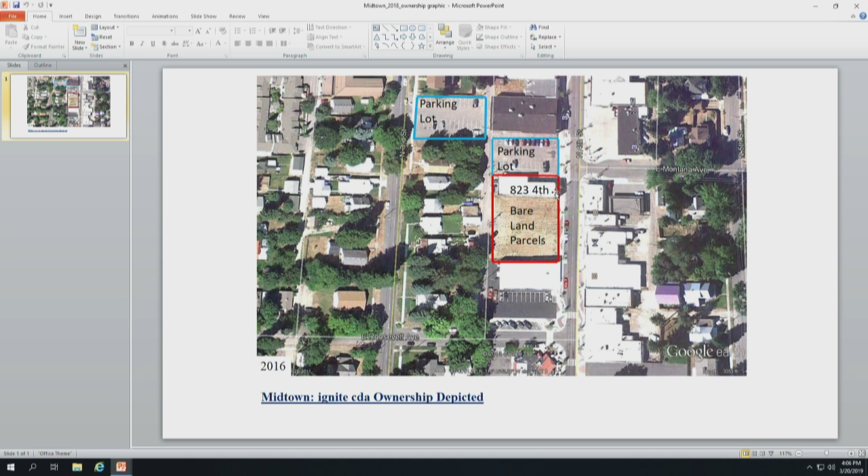She felt the board needs to choose one proposal and move forward. To that end, she suggested that within the next two weeks, by March 6th, interested Midtown stakeholders should provide specific written feedback to the board regarding the two proposals. The agency received feedback from 19 individuals, and that feedback was forwarded to the board for their review. So with that, I'll turn it over to Commissioner Garcia to lead the conversation regarding these proposals.

So, conversation is, I'd like to have a conversation about your comments, thoughts about the two proposals we received, both through the written proposal and the presentation, and just where you're coming from at this point.

Anybody? Comments? Questions? Jim's ready.

I think they were both very well done presentations, but one of them seemed to represent the green space a little further than the other. Also, the timeline for completion on one was far better than the other. I don't know if we want names right now, but there was one that, to me, exceeded the other. And I personally have made a decision.

Are we looking for a name? We're looking for your view, your opinion. Both were good, one was outstanding. I don't think it's out of line to know what you're talking about. Well, you need to know too. All right, again, I wasn't sure of the process. So, the John Butler, in my opinion, far exceeded the other one.

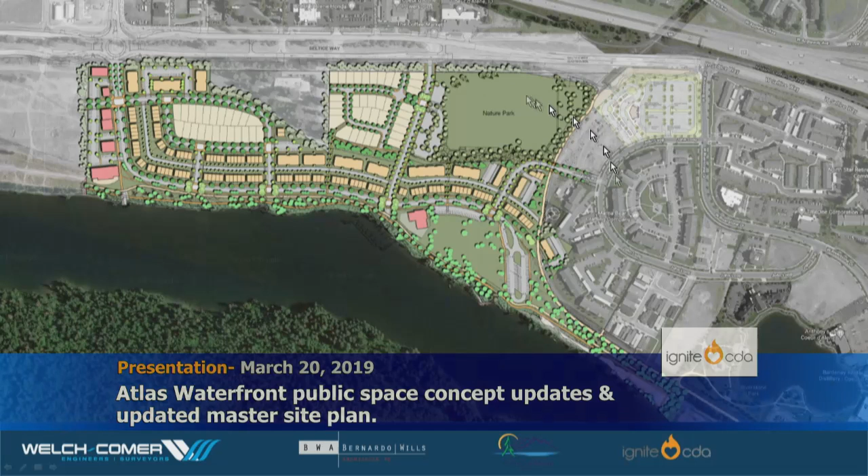Phil, will it still turn and come towards the river, or will it just be straight now? It'll still come down through the river, good question. It'll continue straight through like this, and then we'll still have this turn coming this direction.

This is a really great view, and we want to retain that as we can. It also sets up some nice parcel layout here, and I'll show you a slide of that in a second. One other thing I'll point out is this parking lot, we've still retained this.

Our hope is to make that go away. We're working on a total site parking count and analysis. That's one of the things we heard at our workshop last Friday with City Council and Parks and Rec. City Council is concerned about parking, the neighborhood parking, the Midtown situation, the Fort Grounds area, the things that happen with neighborhood parking when you have great public spaces like this. We're going to focus on trying to put the parking in this area and expand this parking lot and not have to do anything there. We may have on-street parking here, and we may end up with waterside on-street parking here. It's not our first choice, but we're trying to strike a balance between open space, great views, and functionality.

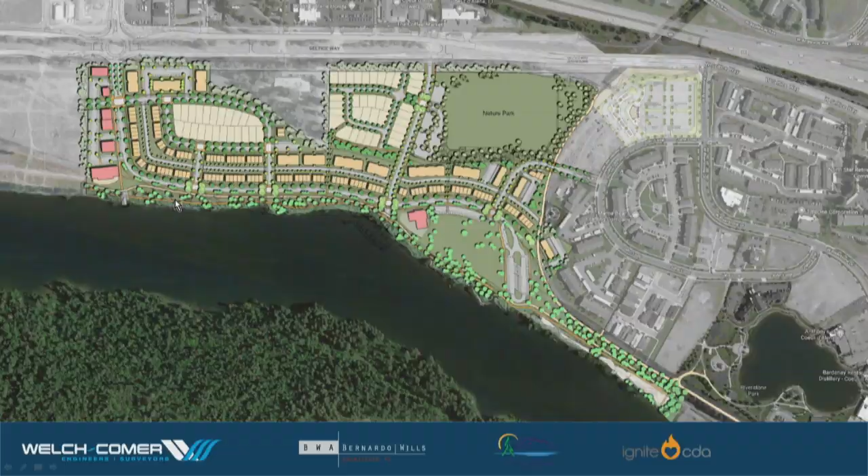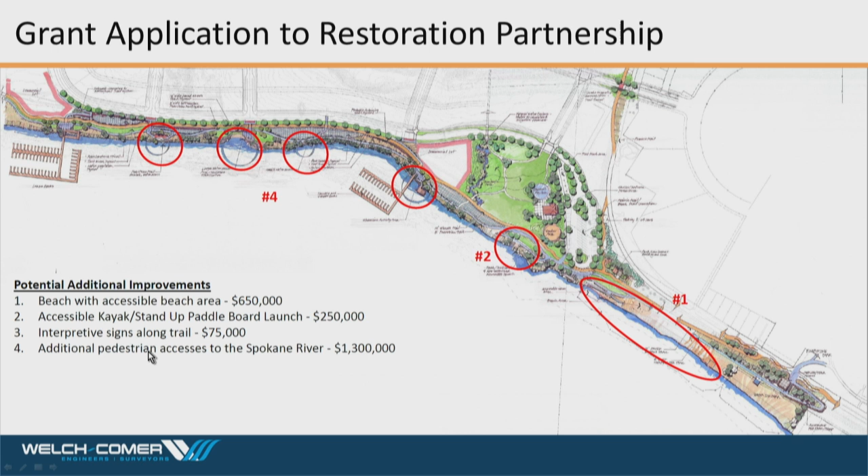Wanted to update the board. We've talked before about grants we're pursuing on behalf of the city and the Ignite. We submitted a grant application today to the Restoration Partnership. We've been working closely with them, and these are the projects we submitted on: 1, 2, 3 is interpretive signage, and 4 is the waterfront access area here. We worked closely with their staff ahead of time. Don't get too excited that we might get all this - we may get some, we may get none of this funding, but they suggested we put it in a menu like this. There's quite a narrative that goes with this that Tony received in the email, but we're pursuing that. So the numbers you see later in the presentation have the potential to go down if the grant funding comes through. This fits in the wheelhouse very nicely of Restoration Partnership because we're restoring the shoreline, stabilizing erosion, and doing a lot of things they support, like giving human access to the water. So we're hopeful, but as you guys know, there's no promises with grants.

So we want to be on the high end of density, get it approved that way, and then the board can choose to dispose of the property based on the way the RFP comes in by block. Because remember, the property will be disposed of by block, and then the developer will come in and make a proposal at that time and say, I think I'd like to do single family here. Another developer might say, I'd like to do townhomes here. That makes sense to everyone, and it's just a progression of where we're headed.

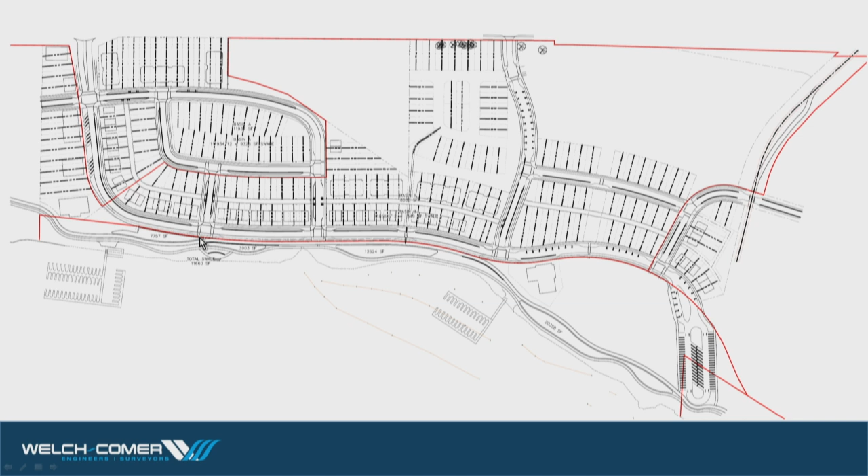But this was driven by the financial feasibility study, because the project had to pencil. So we built the revenue side, but the expense side was still too high. So we had to peel elements out - you can't take out a sewer line, you have to have that - so we had to pull out park amenities. And that's where we're at on the Clean and Green version, and have been since November of 2018.

But it's just, again, I'm trying to provide the complete picture, because I know you guys kind of touch this a couple times a month maybe, to remind everyone where we're at.

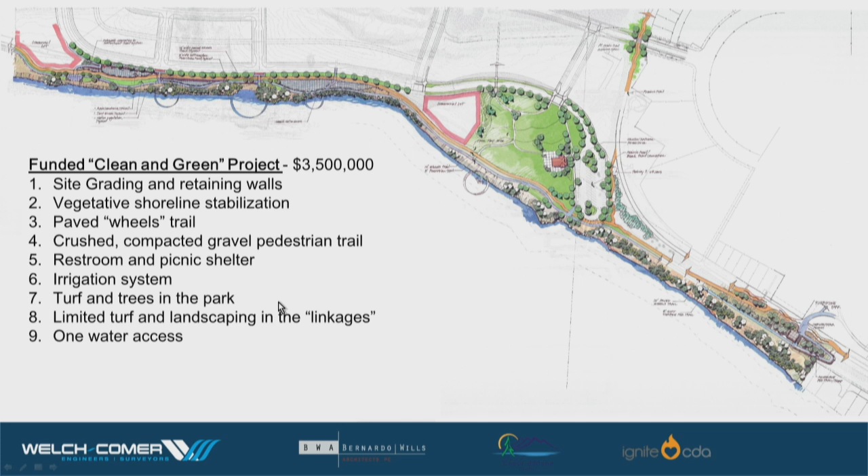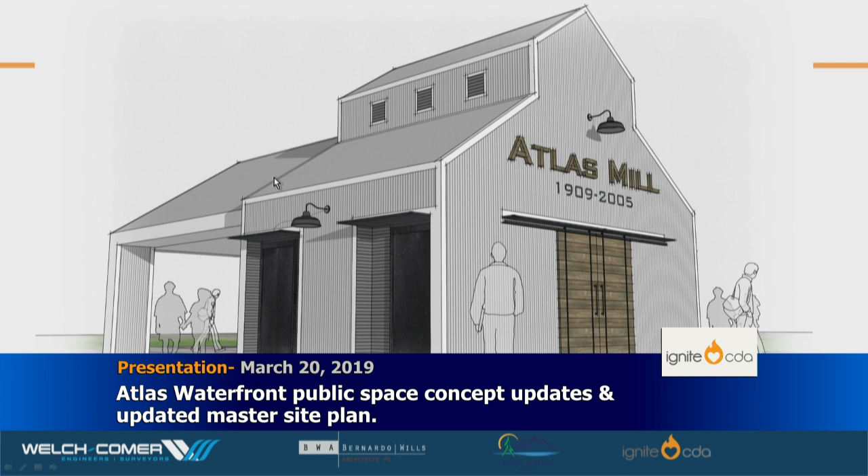Through these - and Dell brought these last at the Parks and Rec meeting on Monday - there are some renderings of what the restrooms might look like. This is maybe a fancier version of what we see down at Memorial. It's the same footprint, so the new restroom down at Memorial and the picnic shelter have the same configuration. What we had heard from our steering committee and from the Parks and Rec Commission is, can you pull in the imagery and harken back to what the mill structures might have looked like? This is a pretty literal interpretation, but this is not my department.

I think it will have some evolution to it. The Parks and Rec Commission was diplomatically quiet when they saw that. There was another version that was modern, but that one got easily shot down, so I didn't show you that one. This is another view of it, and you see the picnic shelter, and the restrooms are back in that area.

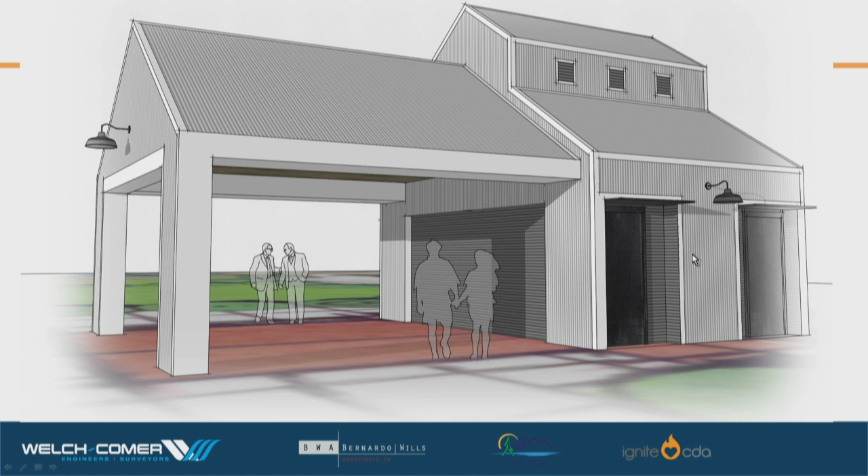Okay, potential additional improvements. As you all know, the Lake District has potentially funding available. Tony has asked the city, could you give the board some indication of what you might like to see funded? The mayor turned to the Parks and Rec Commission and said, on the park side, will you please give us some indication on what you might like to see funded in the Lake District? So that's what I'm going to show you now, both in Atlas and in the BLM Four Corners area, because both of those public spaces are in the Lake District.

So the improvements here are improvements that were identified during the master plan. For the most part, they're improvements that were well received by the community during the master planning, and also during our public open houses and our workshops. We just have not had a lot of negative response at this point, now that we've cleared out some of the more controversial elements, primarily the road that extended through to over to Beebe. You might recall I briefed the board on that last month, kind of the progression on where we had the roads, why we had the roads, and why the roads have gone away that connect down to Beebe.

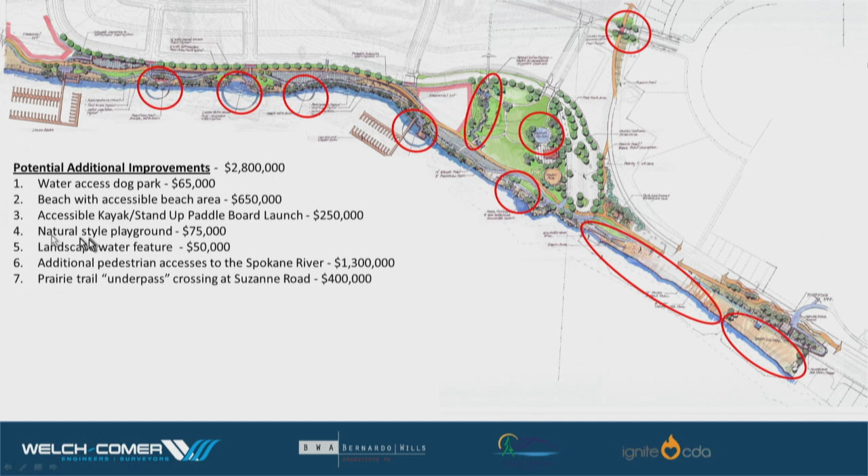Could you just kind of share with the board what you mean by conservative?

Sure, yeah, when I use the word conservative, I mean we're estimating on the high side. And just a note about the estimates, we're way high. We're at the 30,000 foot level, so we're putting big round numbers based on areas and some calculations. But when you get into design level detail, you get into real detailed quantity takeoffs. We're not at that point, because what's the point of doing that? If the board says we're not interested in an underpass, there's no point in doing a detailed estimate.

We've done a couple of these over the years. The last one we did was up on Bottle Bay Road, and I think it was like an $800,000 project, but it was also an ITD project, and it was much more elaborate. So those are the types of things, the numbers, we're working off of.

This other category, these first elements are really elements that the public, when we presented to the public, responded to positively, and they're park elements. You go out, you build them, people enjoy them, and the city continues to pay to maintain them.

There's a second category that has the potential to generate revenue. This category came out of our steering committee meetings, when we were looking at all of this, and our steering committee members are saying, gosh, Bill Greenwood, this is going to cost money to maintain these. How will you fund that? Well, currently it comes through tax revenue, some of their parking fees. Are there other opportunities? So we started brainstorming those and looking for opportunities that both solve a problem potentially in the city and respond to a commercial need that Bill hears about.

One of them is food truck vendors. The food truck vendors want a place to go. So we laid in an area right up here that would be pointed towards the green space. You could pull 3 or 4 food trucks in there. They'd have power hookups. And now you've got the opportunity to add a little action with food truck vendors.

The board might recall we actually put 2 of those out at Memorial. So if you go to Memorial next time and look for the power pedestals, there's a place that Bill can lease those food truck areas in that location.

This next one, the vendor police building, you might have a paddleboard kayak vendor there. If we're going to build a building, Christy Wood had suggested, is there an opportunity to put a location for the police to go have a presence, do their paperwork, and just be there. Not hard to create a little office off to one side that shows folks there's a police presence there. It's kind of a double use.

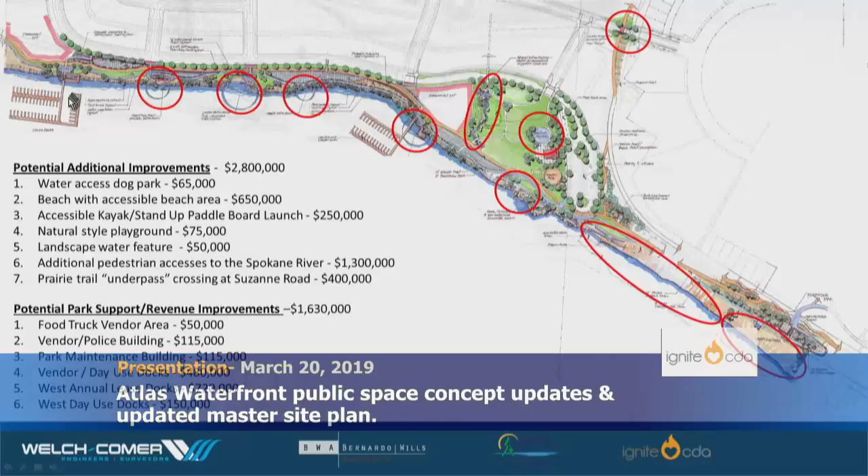This one here is a little bit on the edge, but it's annual lease docks, so this might be docks leased to property owners up here. That way it doesn't generate a parking requirement because they're for the residents in that area. You can imagine the issue this might raise for the rest of the community: why can't I lease that city available dock? So there's some leasing issues with it, but it can also generate some pretty good revenue. This wing right here could potentially be a day use dock that might support a commercial use in that area.

So that's the thinking behind that group of improvements, because we're trying to populate the Lake District potential projects. These happen to be with Atlas for the board's consideration down the road. Any questions on those before I move on?

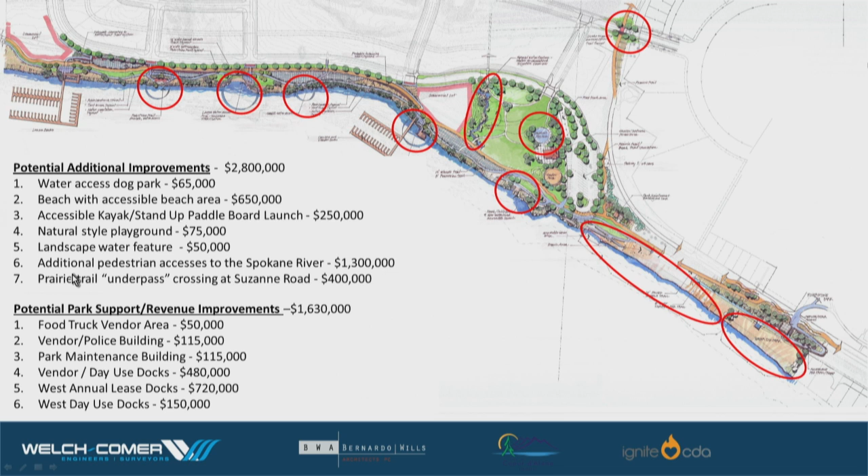Looks good. This is the summary of the dock revenue that might be generated. These are some numbers Bill and I estimated. On the day use slips, I've talked about that. The annual lease docks could generate pretty good revenue because on the lake they're pretty expensive to lease.

The vendor boat slips could also generate some pretty good revenue, but one of the other important things to consider is the reduction in congestion in downtown Coeur d'Alene at the 3rd Street launch and just moving around town. Instead of seeing people pulling boats all over the place, they might be housed down here. So it has some additional off-site benefits.

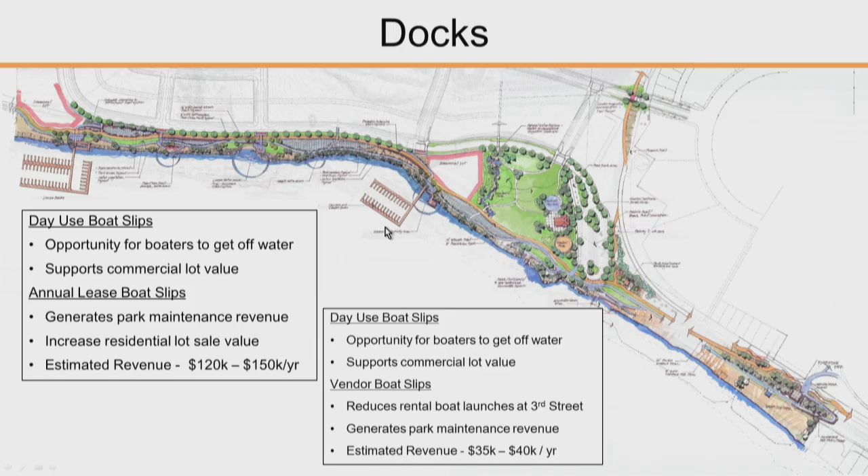We're going to move on to the BLM corridor. You guys remember this because you funded this master plan several years ago. The corridor started here at Four Corners and continued through down to this area. Many of the projects you've already accomplished: Memorial Park expansion, Fort Grounds Drive reconfiguration, additional parking.

You're currently headed to work on the Memorial Grandstands, skate park. A lot of those elements have been completed in here. In the River to Hubbard segment, there wasn't a lot planned for that. It was primarily landscaping and trail reconfiguration. North Idaho College is funding that.

The mayor had negotiated a deal with them to fund that. So a good portion of the projects identified in the master plan between Four Corners and Hubbard will be complete at the end of the summer.

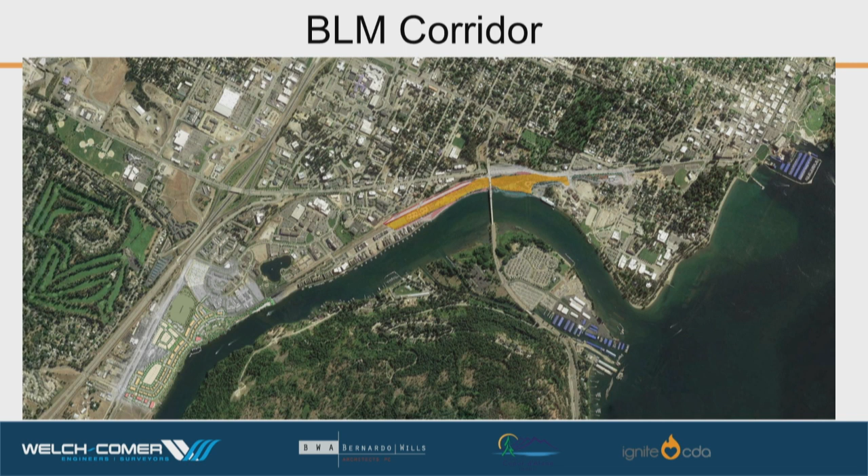From Hubbard to about this side of the bridge, Bill with his crew and with volunteers have gone in and done a lot of the projects associated with bikes: the cyclocross course, the pump track, the skills course. So several of those are finished in that area.

There's some other ones, and this is just an excerpt out of that master plan, that obviously aren't done, but the world has changed since this master plan was completed. Atlas is now on the table, and it may make more sense to fund projects there.

And as Bill and I worked through them with the Parks and Rec Commission, that's the conclusion they all came up to. So rather than putting docks here, if we're going to put docks anywhere, let's not put them here because we'd have to add a parking lot. Let's put them down at Atlas where a parking lot already will exist that is currently being funded.

So we took that eye and went through this whole area and started analyzing what would be the city's priority for making improvements to Lacrosse. One option is to just leave it there and not do anything with it. But that doesn't make very good use of public space that the city worked pretty hard, along with Ignite, to get into the public realm.

The idea would be to go in and pick off the projects that are most important now that could be funded with the Lake District funds. The first project would be this Lacrosse piece here, because obviously if you're going to develop public space, you have to be able to get to it.

I broke this into two phases. When I presented to Parks and Rec, I only showed phase 1 because phase 2 is really not a park-related question. Phase 1 would put the bases and conduits in for the signals here, and build the road down in this direction over to here. The road would stop at a gate, so there would be no connection to Bellerive, and it would service this parking lot. This portion of the parking lot would not be built, and the micro soccer over here also would not be built. But the idea is to build the backbone, get people to the park.

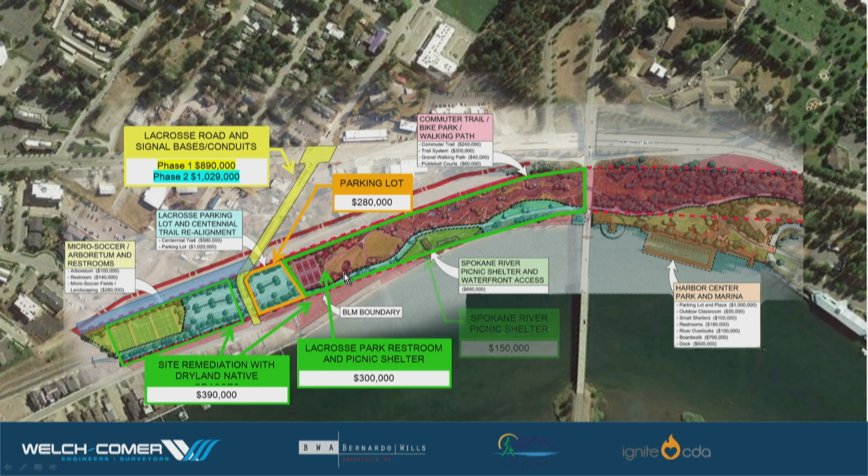The lacrosse park restrooms—the idea is if you're going to build the place for public to go, you probably need to have a picnic shelter and a restroom for them. Potentially over here, a riverfront picnic shelter. That's a beautiful spot, and we could use a prefabricated structure there. And then putting in the gravel walking trails—rather than just having a big area of grass, put some gravel walking trails through it so you can take your dog and go wander around out there.

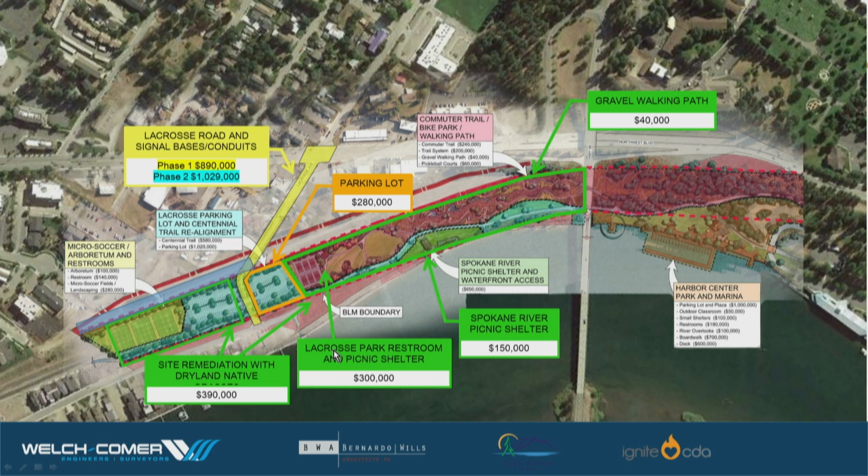It's always that way, isn't it?